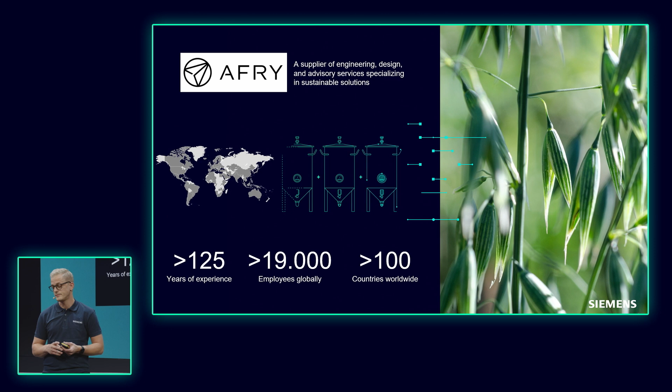So, if I go to the challenges, we can look on the first part. We separated it into 4 main pillars. The first thing is accelerating time to market. What does that mean? When we talk about the Greenfield factory, that means everything is new. How can our drive adapt? How can our TIA portal with the S7-1500 PLCs adapt to this? Can it be a long cable length? Can it be solved with the G220?

And for the next part, we talk about shortened commissioning. Can we use the digital twin to make it even faster, to have it integrated in the TIA portal? Maybe.

And for the third part, we want to avoid failures. That means the installation needs to be clean, and we want to be as easily integrated as possible. And for the fourth part, we talk about increased energy efficiency. When it's real in this project, we talk about the food of the future. So with the food of the future, we also need a really good, efficient drivetrain. And that can be solved.

Those were the challenges from AFRY, but Christian, how did we help them? What I did here is separate it into 3 pillars. The first pillar is efficiency and sustainability. With the G220, we have an integrated web server as standard. It's all integrated in the TIA portal, and the SINAMICS G220 comes with ProfiSafe as standard. That means we can have safety over bus, integrated directly in the TIA portal. So you're working with one project. This is important.

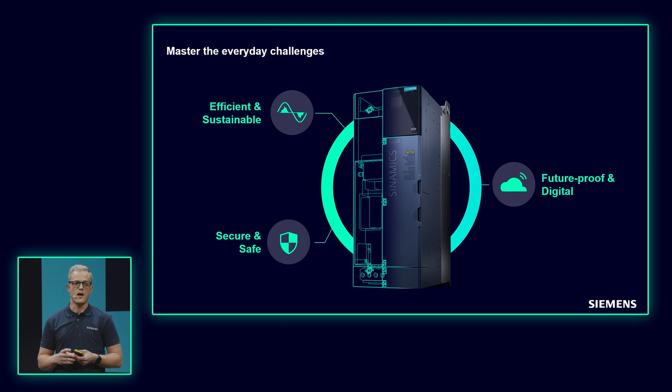And the next thing, we talk about future-proof and digital. With this drive you can add option cards. That's one thing we can move on and take the data to the next level. We have an IoT module that we can add to it, so we can have predictive maintenance on the drive. That's new with the G220. And when we talk about digital, we can simulate the drive in the TIA portal, and that is a really, really good thing. That helped AFRY in this case.

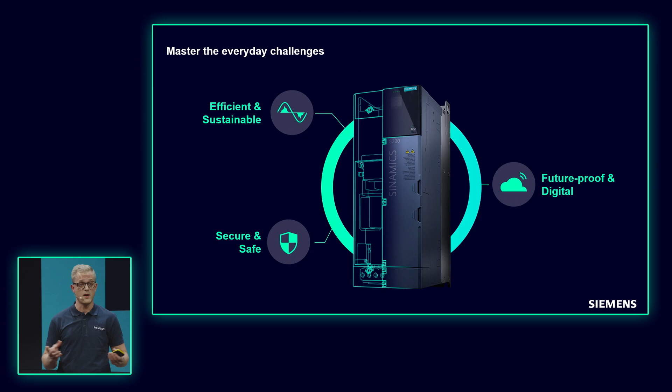But enough of what I've been talking about now. What did AFRY actually say in this case? First of all, I want to thank Peter Forsang for this, but he sent us this quote, and he really liked the ease of use with the SINAMICS G220 inside the TIA portal, and he really liked the DriveSim portfolio that we are offering with our SINAMICS G220. It's also called DriveSim Engineer. We also bought it for this project, and we're really excited for it.

And with that said, I thank AFRY, and I will hand over to you, Anna. Thank you so much, Christian. In summary, this was one of the success stories where our G220 can transform operations for the food and beverage industry, but not only for the food and beverage.

Our SINAMICS G220, as we can see here in this nice video, maybe another one? Yeah, now you can see it. So our SINAMICS G220 is also the perfect fit for other industries in the process, in the hybrid, and in the infrastructure, like chemicals, oil and gas, pharma, and many, many more.

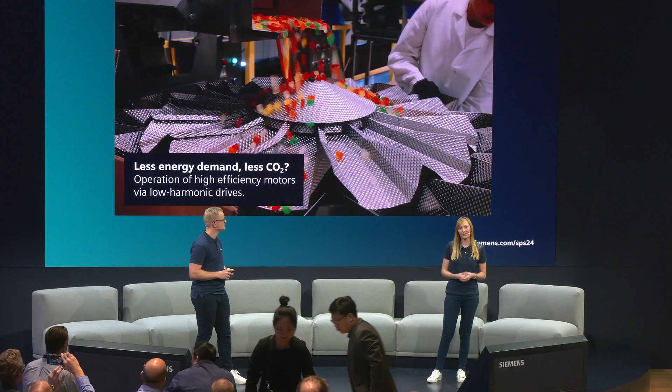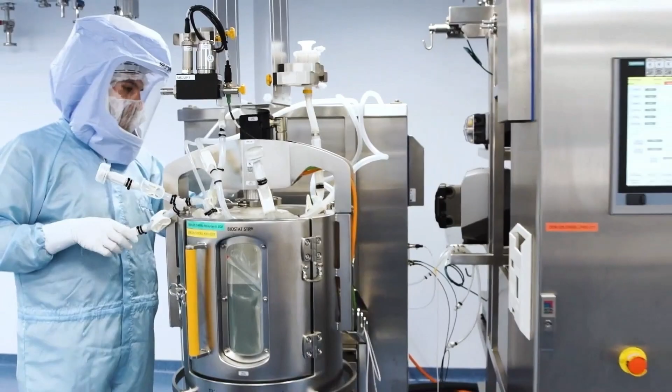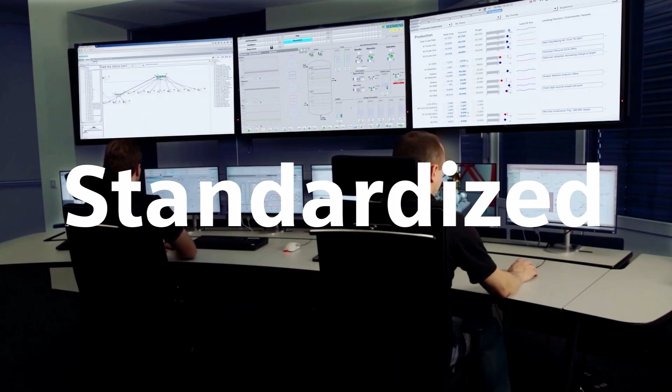So with our SINAMICS G220, we believe that innovation in our drive systems can tackle all the main challenges, and our customers can benefit from reduced emissions, increased energy efficiency, also power quality in the systems with the clean power variant, safe and secure operations, and reduced environmental impact for sure. High adaptability is also another of our highlights. In terms of market changes, the drive can easily adapt to any situation.